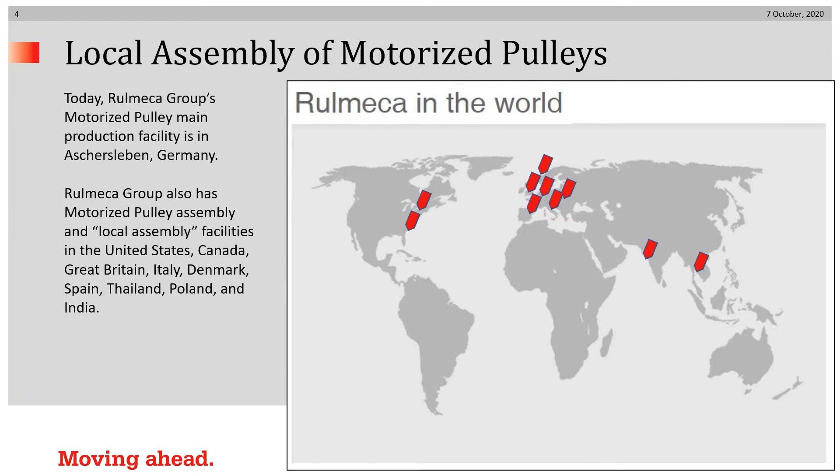What you're looking at right now is the slide that depicts assembly and local assembly centers around the Rulmeca world. Our main production plant is in Aschersleben, Germany. We also have other assembly plants or local assembly plants in Canada, the US, Poland, Denmark, UK, Spain, Italy, India, and Thailand.

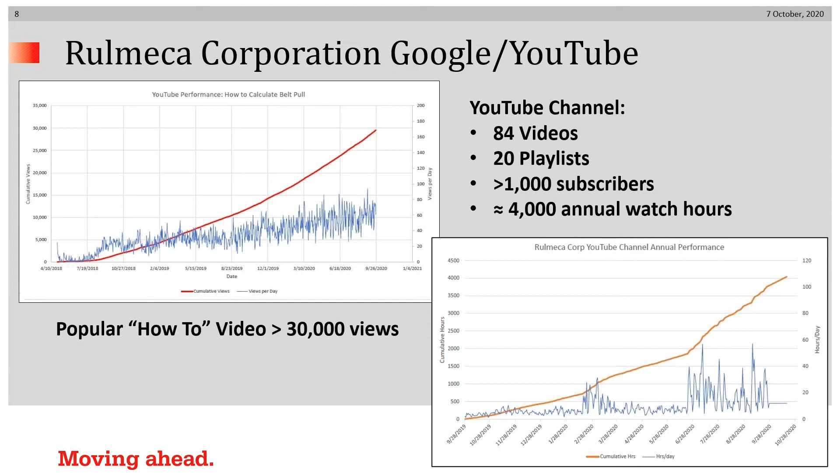We're happy about all that stuff, mainly because it's providing information to folks who need it around the world 24/7. When we're sleeping, the videos are still talking, if that's convenient for you. We now have 84 training videos and 20 playlists, 11 of which were created specifically for the MOOC, the course.

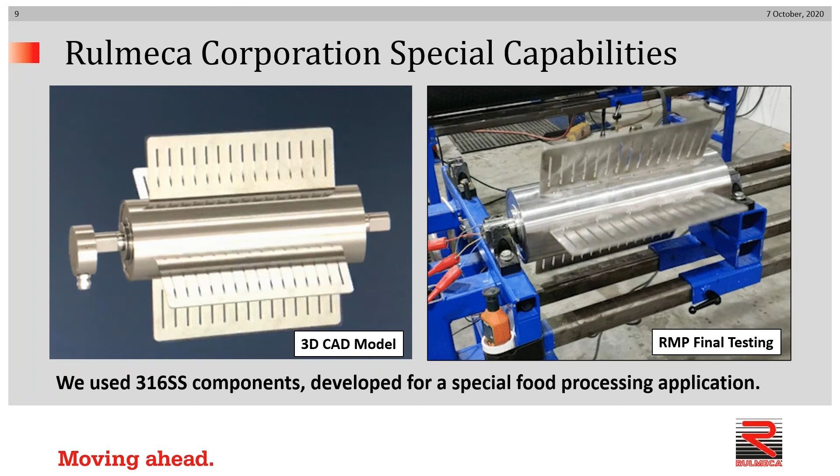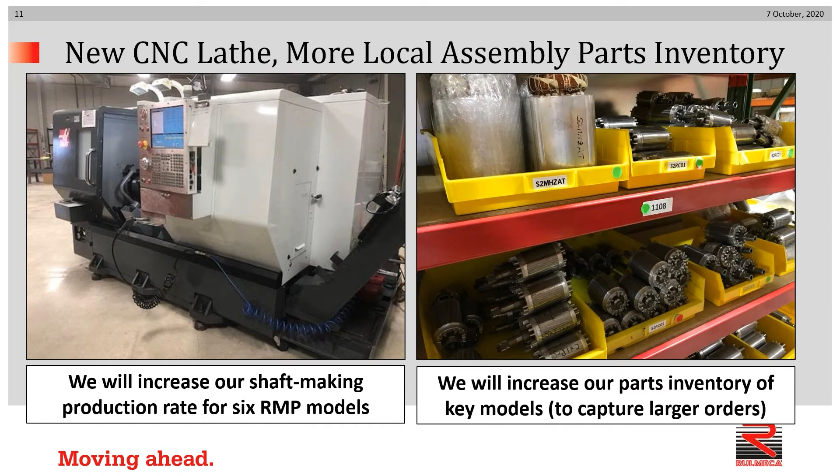And on the right, you just see a picture I took a couple of hours ago to show you some parts in stock. We have permission from the holding company to increase our inventory by the end of this year, particularly in small motorized pulley parts, in order to enable us to capture larger orders. Whereas for some years we were able to do onesie-twosies pretty quickly, now we're challenged with plenty of opportunities to do 10sies and 12sies, and we're preparing ourselves to do just that.

Now I draw your attention to a news item which pertains to calculating power in conveyor belts. The old Microsoft Excel program, which was written back in the 90s, which we've used until very recently, has been superseded by a free cloud-based online version, which is based on the latest CEMA edition of conveyor drive power methodology.

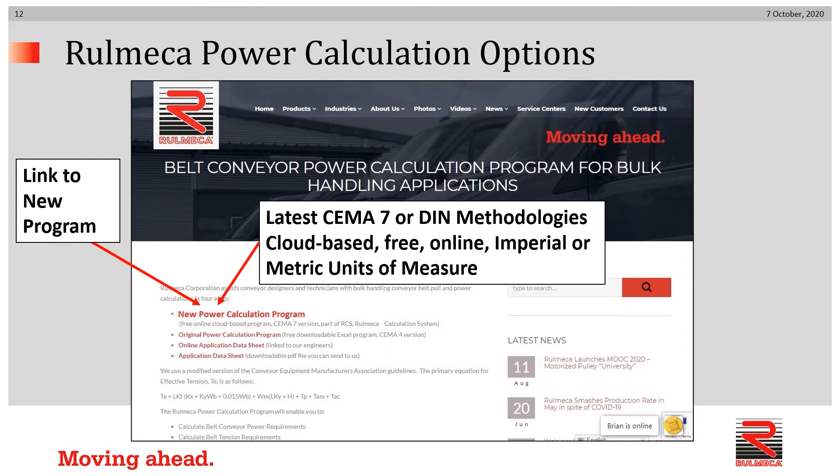As well as DIN for the European users of it. And it's available not only in imperial units of measure, but also metric. You can find it on our website, linked as you see there.

Here is a summary of the 6 components of the first semester, which we will be discussing. First, we have the introductory material. For those of you that aren't familiar with the spreadsheet in the back, it shows the duration of each video and gives hyperlinks to the individual videos, as well as a playlist for each of the 6 modules.

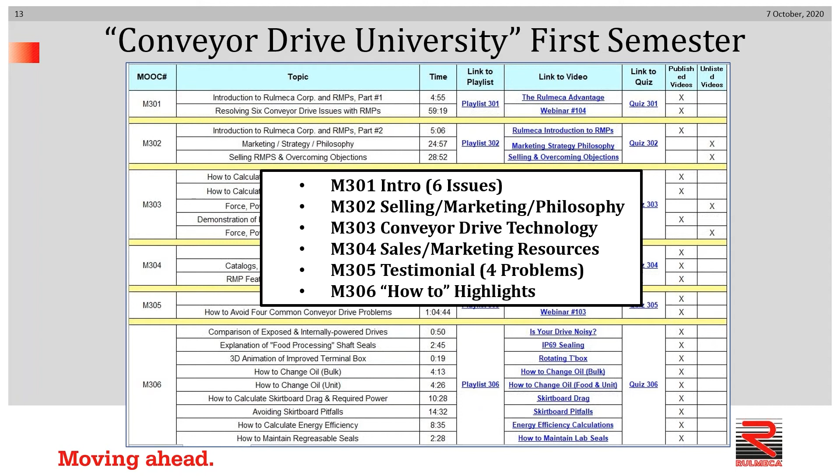And a hyperlink to the quiz. So we'll be discussing segments of each of these things, including the introduction, selling, marketing, and philosophy, conveyor drive technology, your sales and marketing resources, conveyor problems and a testimonial, and finally some how-to highlights from our short segmented videos. Let's look at the introductory material.

As those of you already know who have seen the video, we highlight the fact that we offer the Rulmeca Advantage. And what is that? Well, the Rulmeca Advantage is rolling up our sleeves and partnering with our customers to solve their conveyor problems, no matter what it takes. And as I hope you'll see in the next hour, we're serious when we say just that.

The webinar, which we did some months back, helped viewers resolve 6 conveyor drive issues, namely reliability, maintainability, safety, space or weight problems, belt slippage problems, and inadequate power problems. You have before you a picture of an example of an exposed drive system, in fact, 2 exposed drive systems in a very, very corrosive solar salt mine environment.

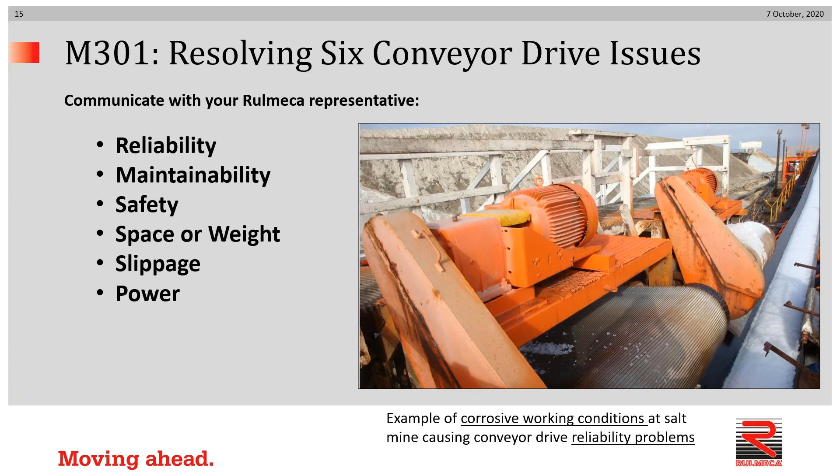Let's talk about what is the potential solution, or how is the motorized pulley a potential solution to those 6 things that I mentioned previously.

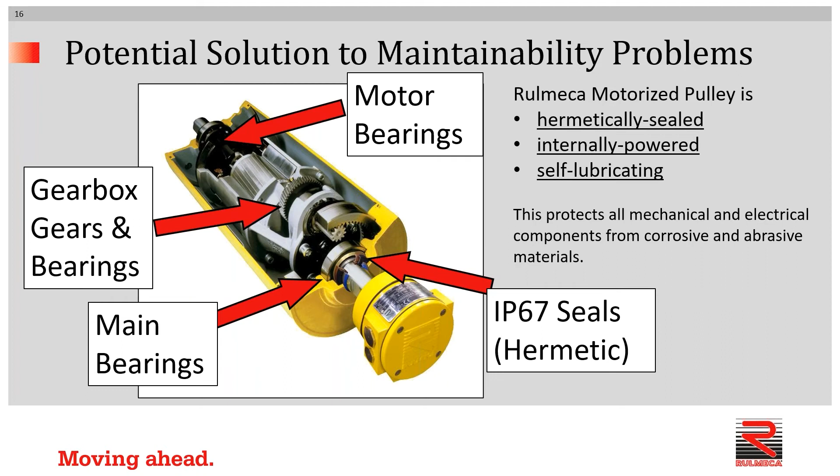It's a potential solution because the motorized pulley concept offers a conveyor drive package which is hermetically sealed, internally powered, and self-lubricating. As you can see pictured before you, the motor bearings, the gearbox, gears, and bearings, and the main bearings are all enclosed within a hermetically sealed shell. And that is the secret of success. We protect the important components from harsh elements.

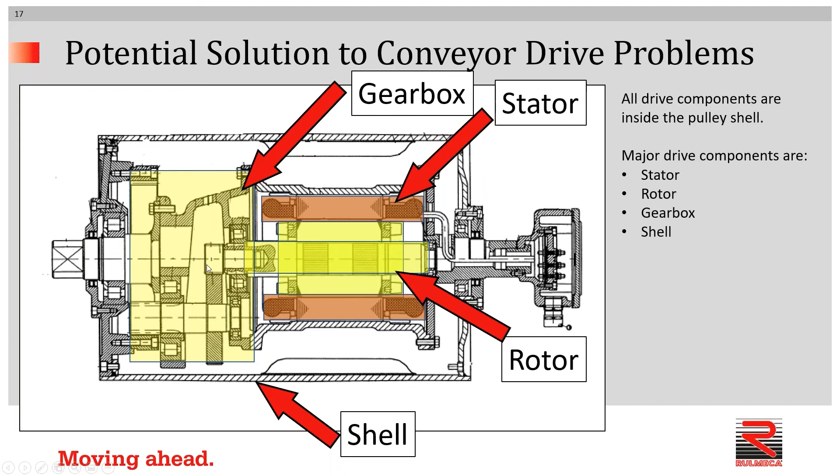This cross-section allows us to show the basic elements, namely the stator, which is shown in orange in color, the rotor, which of course rotates within the stator and is directly coupled to the gearbox, also pictured here in yellow. These 2 components, the motor and the gearbox, are enclosed and protected.

We attach drip lips to the inner surface of the pulley shell so that oil can be circulated. And that oil serves 2 purposes. The obvious one is lubrication of all mechanical components, and the less obvious one is its usage as a heat transfer medium to get heat from the hot stator transferred to the pulley shell so that heat can be dissipated through the shell and into the belt, which we use as an infinite heat sink.

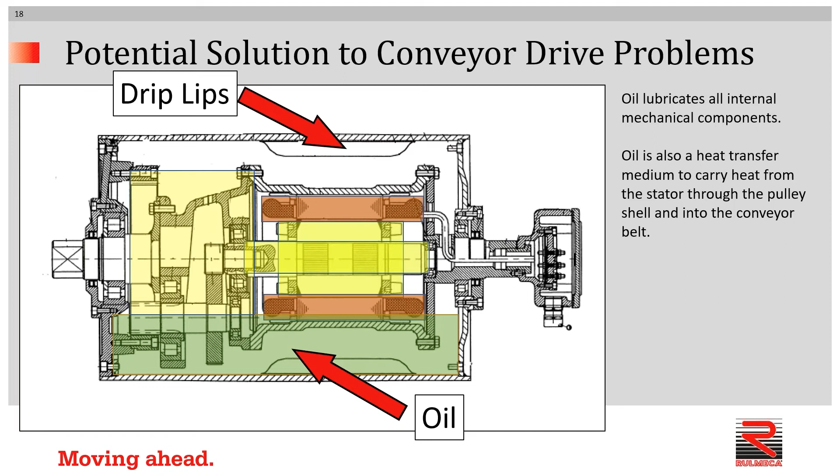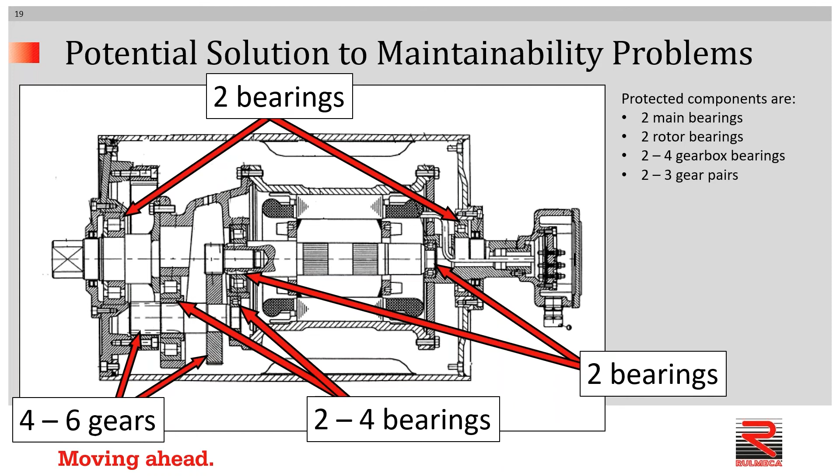This is a new slide we put together fairly recently, and you can see the number of bearings and the number of gears which are all protected through this hermetically sealed, automatically lubricated drive system. There can be as many as 4 gearbox bearings or 3 gear pairs, as you can see pictured here.

The drip lips act like a water wheel to constantly pour oil onto the stator and splash it through the inner workings. And most people nowadays specify synthetic oil, which is good for 50,000 hours of operation.

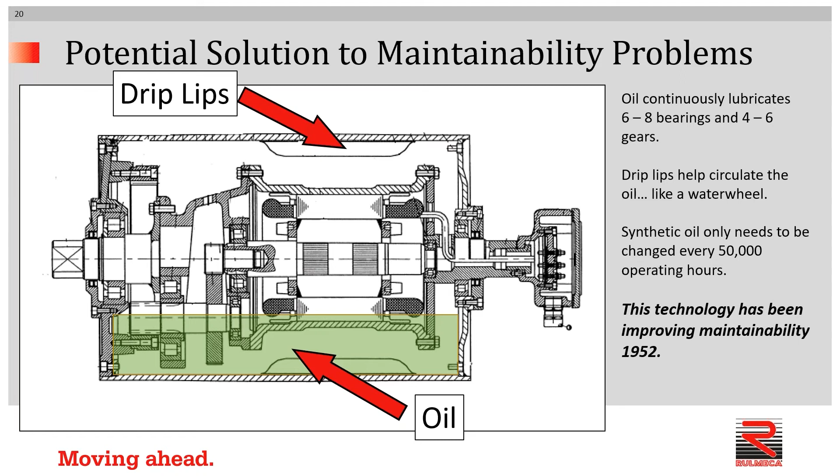And for those of you who may be new to the motorized pulley idea, we've been doing this since the early 1950s. This is old technology, which we constantly improve, but the idea has been around for a long time.

Here's a way that the motorized pulley can enhance safety or improve safety. I took this picture at a power plant in the UK a few years back. In the upper center, you can see an exposed drive system, which was originally mounted above the chute, which transferred coal into these deep bunkers.

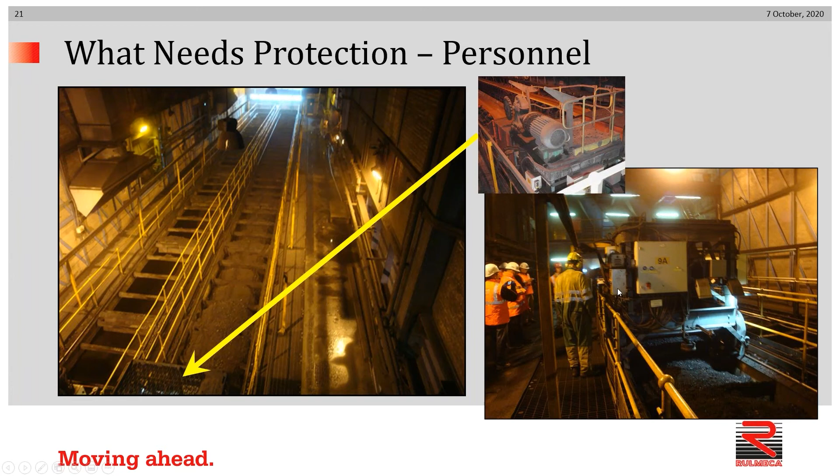A maintenance man was maintaining this thing, and unfortunately, a weld broke on the handrail, and he could have fallen to his death in one of these bunkers, but fortunately for him, it had just been filled with coal. He wasn't hurt, but plant personnel took careful attention to the fact that the exposed drive system, which was getting long in the tooth, needed to be taken care of, and their idea was to install a motorized pulley, which of course, in a sense, is self-maintaining.

These are new slides for us. For those of you that have seen some of these presentations in the past, they help us to illustrate that the motorized pulley centers the weight between the two support beams, it enables manufacturers of conveyors to use lighter structure than otherwise might be possible.

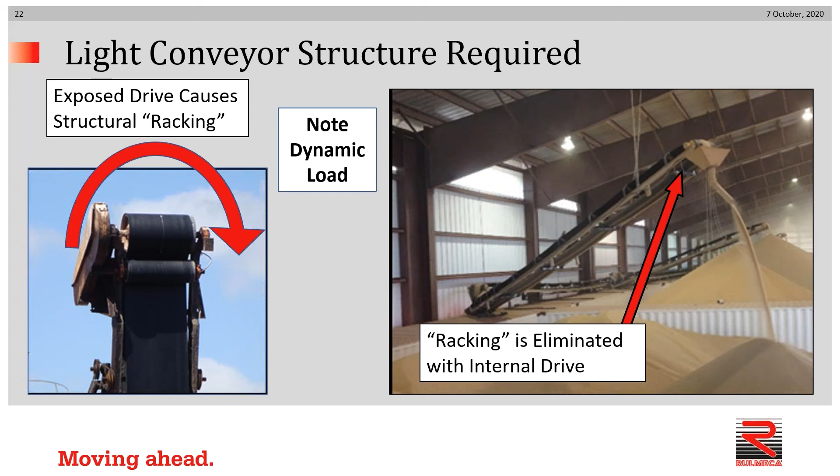Because it sits between the beam, there is no overhung load. The weight is supported more or less evenly between the two beams of the conveyor. And also because the torque is transferred through the dead shaft and into the structure, we avoid the racking action, which is very common, particularly on flexible conveyors.

In addition to the obvious reason why a motorized pulley is compact, because the parts are on the inside, the less obvious thing is that motorized pulleys in general are approximately 30% lighter in weight than an exposed drive system. There's no cast iron enclosure required for the motor or the gearbox, because we use the pulley shell as an enclosure. So we eliminate that redundant part.

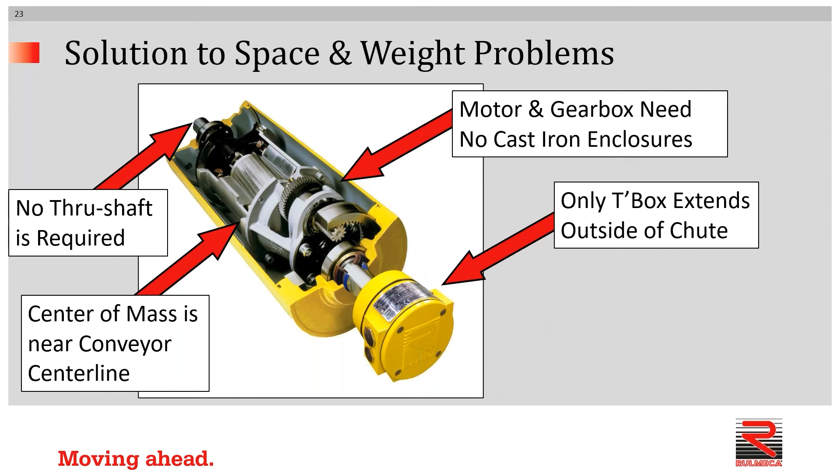In addition, this customer added more power to the conveyor.

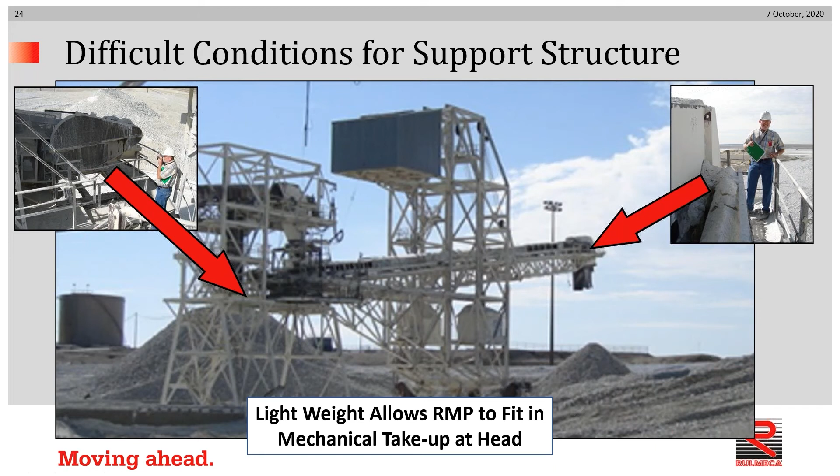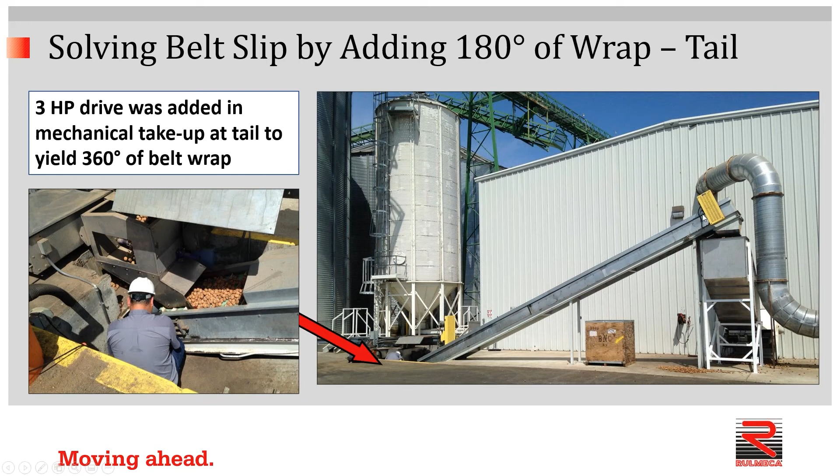You can see one of our distributors taking a look at the tail section and taking measurements so that a motorized pulley could be fit into the tail. So the retrofit was to eliminate the exposed drive at the head, replacing it with drives at the head and tail. Slippage was solved cold.

This is another example of a conversion from a single drive at the head to a dual drive at the head and tail. This customer had a problem with inadequate power at startup, and that's what prompted the call to Rulmeca Corporation. Our calculations showed that the original 75 horsepower was inadequate, so we recommended converting to two 50 horsepower units, one at the head and one at the tail.

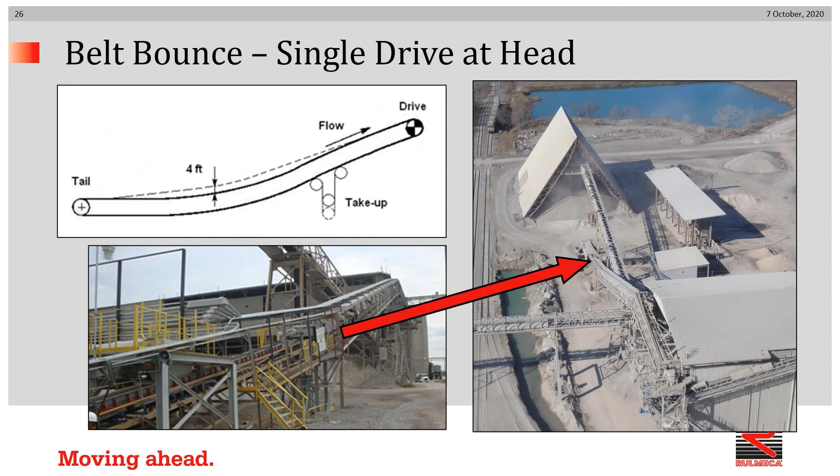That was done, and the customer was not only satisfied that extra power solved the startup problem that was occurring, but it gave a side benefit as well: it eliminated a belt bouncing problem, which occurred every time the conveyor was started up empty.

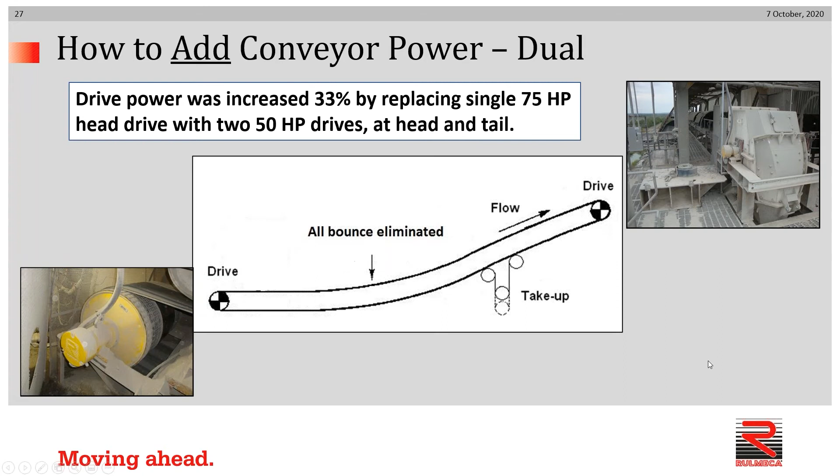So installing a drive at the head and a drive at the tail not only afforded more power, but also handled the belt tensions in such a way that problematic belt bouncing was eliminated. And it wasn't just a noise the bounce was making—it was actually causing damage to the belt occasionally, and sometimes damage to the feeder support structure as well, all completely eliminated now.

Let's have a look now at module number 302, which addresses marketing philosophy and strategy, if you will.

Our company is committed, and this webinar is one example, to training salespeople to be subject matter experts. We need to be able to help users and designers of conveyors to optimize what they have. We spend a lot of time doing that: writing papers, making videos nowadays, putting information on our website. When possible, pre-COVID and post-COVID, we do on-site training.

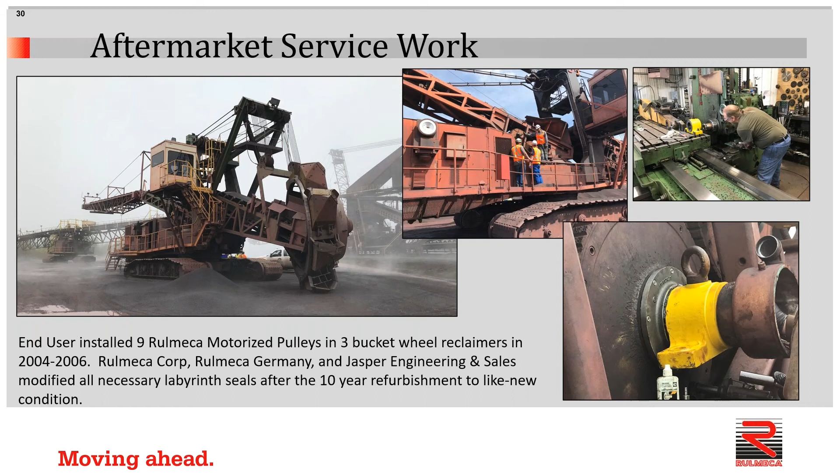Here's an example of aftermarket service work. This end user installed 9 of our large motorized pulleys, 100 horsepower or larger, on 3 bucket wheels, and did a refurb after 10 years of service. During the refurbishment, there were some problems encountered, so Rulmeca Germany, our sister company, as well as us and our local distributor, Jasper, partnered to help this customer make his 10-year refurbishment like new. And we honored the warranty even though it had expired many, many years prior. That's kind of our attitude.

Let's take a look at some additional items in Module 302. How would a salesperson overcome the statement that your price is too high?

Your motorized pulley drive is a premium compared to the way I've been doing it for 10 years. Why should I consider spending more money? Well, we suggest that end users consider the fact that downtime is expensive and exposed drive systems can break down since they're less protected than motorized pulleys are.

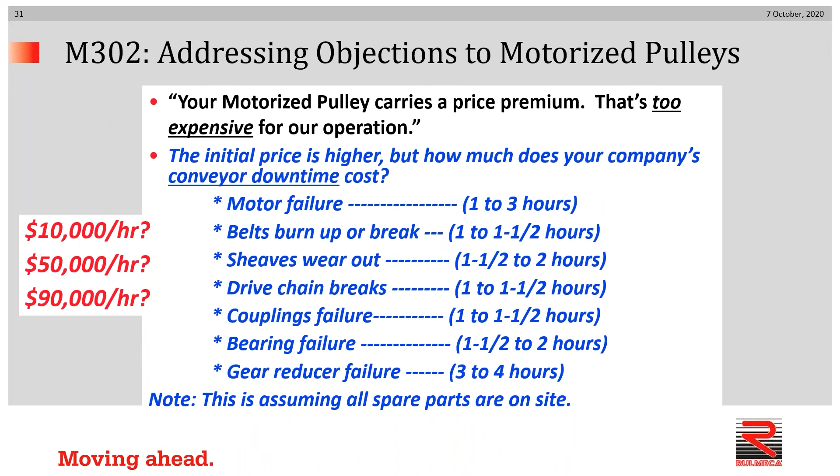Even though the individual cost of the components might be less at the outset, it's important to remember that all of the parts need to be stocked. That's an important consideration. And of course, we always suggest that operators think of what downtime costs. Is it $10,000 an hour, $50,000 an hour, some huge amount of dollars per hour? If that's the case, then the premium price for a product which is more reliable could actually offer the lowest total cost of ownership.

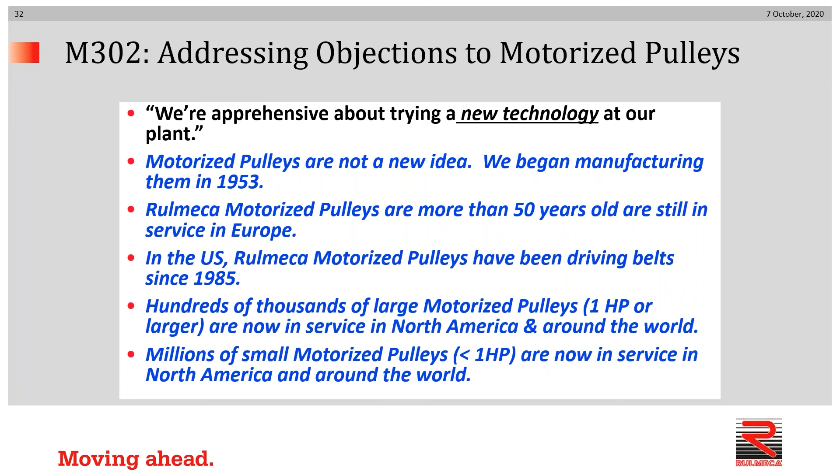Sometimes we hear as we make presentations that people are apprehensive about this new technology. Well, as I said previously, we started making them in the early 50s. And there are hundreds of thousands of large motorized pulleys in service throughout North America and the world, and literally millions of small motorized pulleys in service in North America and around the world. Believe it or not, motorized pulleys in excess of 50 years old are still working.

Let's turn our attention now to some topics on the subject of conveyor drive technology, particularly belt tension. We have one full video that explains how to calculate TE, which you see pictured on the upper right-hand corner. It's essential to know TE, or effective tension, in order to be able to figure out how much power is required to move the conveyor belt.

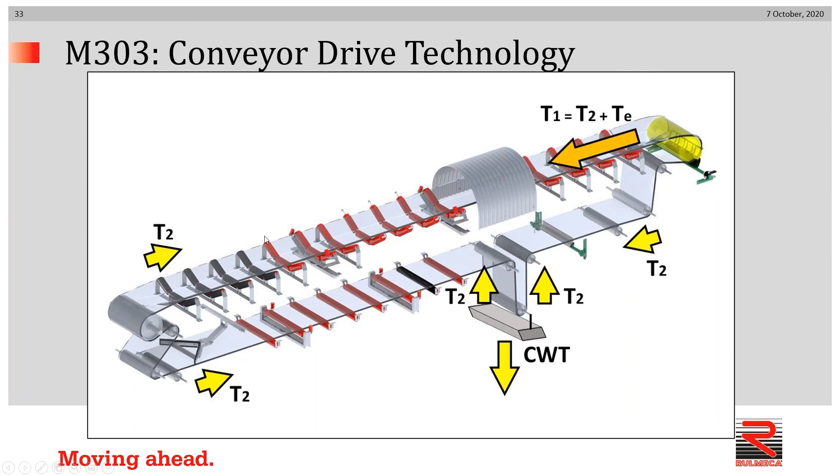In addition to calculating TE, and we have programs to do that, you can do it yourself or you can ask us for assistance. It's essential to calculate T2, and T2 is the tension required to prevent slippage on the pulley face, and T2 is also that tension required to prevent sag in the lowest tension area of the belt. So we help with that stuff.

Our videos covered a tutorial on force, work and power, a very basic rudimentary thing, 30 minutes of that. We also presented a video on how asynchronous three-phase motors work, and I really draw your attention to that if you haven't already seen it. It takes the mystery out of it. And we put together both unit handling and bulk handling short videos, and all of these have explained in as simple a manner as possible how to go about calculating required belt pull, and therefore how to calculate required belt power.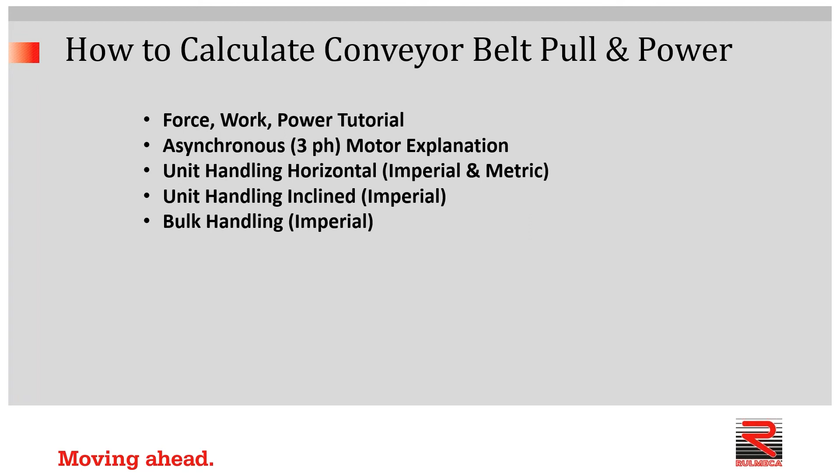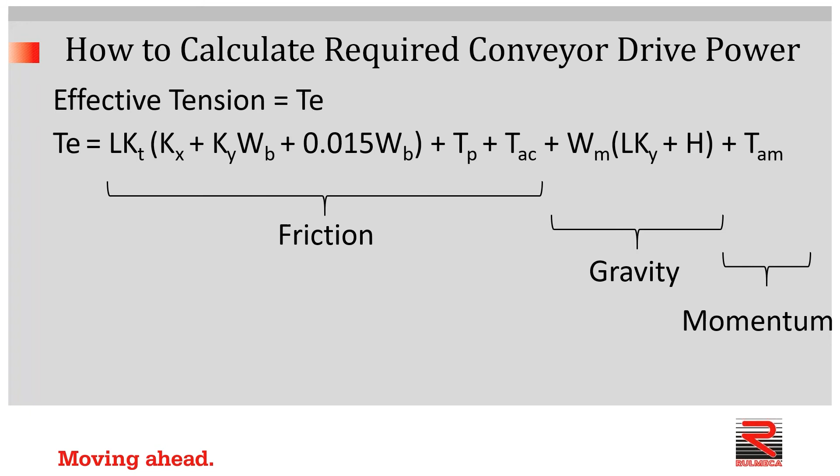We won't go into this equation, but this is the equation we've used for more than 20 years. It's called the historical method developed by CEMA, now superseded by the universal method in the new program I mentioned, which has just come online within the last few months. But we've used this equation to develop the tension required to overcome friction, gravity and momentum. And the takeaway for all of you folks who are hearing some of this for the first time is this.

Let me simplify all of these numbers and letters by saying belt power, which is required to move a conveyor belt, is simply the product of the effective tension in pounds, in imperial units, multiplied by the required belt speed in feet per minute. Pounds times feet per minute gives you the power.

And we know in imperial units that 33,000 foot-pounds per minute equals 1 horsepower. So if you know the number of pounds you need to pull on the belt with and the feet per minute you need, then you, by definition, know the power.

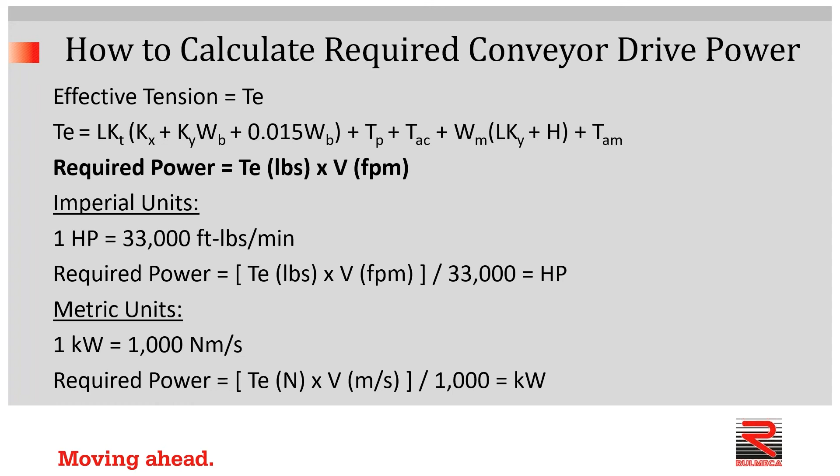And in metric units, we know that 1 kilowatt equals 1,000 Newton meters per second. So if you know the number of newtons to drive your belt and your belt speed in meters per second, you can certainly calculate the required kilowatts.

Now, here are some resources for both sales and marketing personnel, as well as end users and designers and so forth. This is a screenshot I took of our website. You can see the hyperlink where you would click to get the power calculation programs, of which there are 4. Also, we have plenty of catalogs and brochures, as you would expect.

And since about 6 months ago, we've been using a new online chat service. Brian, are you able to add some comment on that chat service? I guess we were surprised to see how much usage it was getting, right? Yeah, we get a fair number of users per month, some handful.

We noticed kind of a trend, and some of our customers, vendors, and colleagues in this conveyor design world were using this technology. It's inexpensive to use, it's easy to use, so we put it on our website just to check, and it's good. A lot of people who may or may not have the time to send emails just want a quick answer, or just want a quick reach out, it's an easy way to reach out to us.

We generally man it from 8 to 5, and then afterwards it's basically an email service. So if you get to us after 5 o'clock Eastern, it'll send an email and one of us will respond first in the morning, or maybe even that evening. I guess it depends on the urgency of the email.

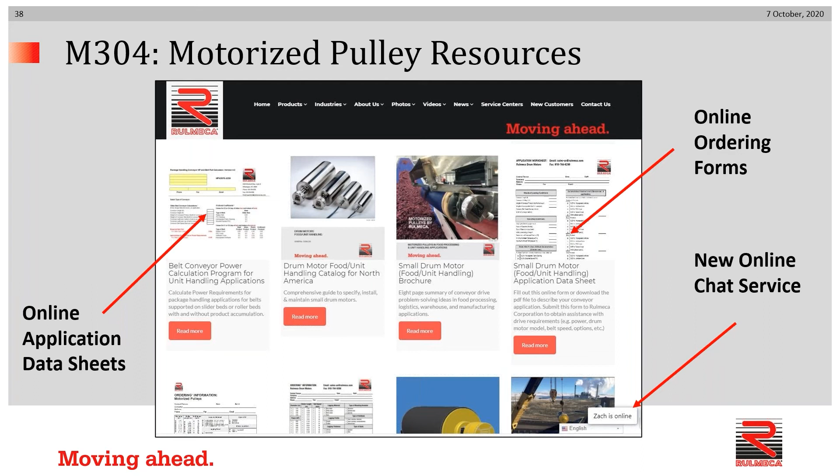Continuing on with resources available in downloadable format are our online application data sheets, both for bulk and unit, our online ordering forms for bulk and unit, as well as brochures, flyers, and technical papers.

Now, I want to toot our horn on this YouTube channel because we have been amazed at how many people have apparently seen it to be a benefit. Now we have 84 videos all told, 20 playlists. As I mentioned previously, 11 were created for the online course that we're having a midterm for right now. We have over 1,000 subscribers and more than 4,000 annual watch hours.

We've developed a playlist in such a way that if somebody wants information, they can select the appropriate playlist, whether it would be something of a technical nature or something of a commercial nature. That's all there for your viewing pleasure.

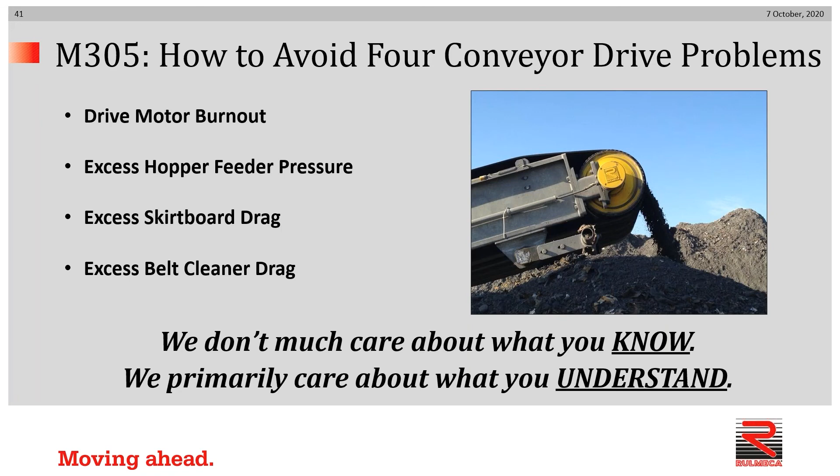Let's turn our attention now to the 5th module in our first semester. In that module, we went through drive motor burnout, excessive hopper feeder pressure, excessive skirt board drag, and excessive belt cleaner drag. I'm going to skip discussion on hopper feeder pressure, skirt board, and belt cleaners because we'll go through that in more detail in the final, on December the 9th, when we have our next webinar following the 2nd semester, because the videos go into more detail. So we'll skip that for now. However, we will spend some time looking at the topic of drive motor burnout because it's a pretty important topic, and this is a great place to cover it.

Why do conveyor problems occur? Well, sometimes the wrong equipment is installed. That's pretty obvious, you shouldn't do that. But more often than not, correct equipment is installed, but something has changed. Maybe this is obvious to some, maybe not to others, but the correct equipment may have been installed, and something such as conveyor handling rate may have changed. Maybe production pressure to go from, say, 400 tons per hour to 800 has put a strain on something, causing what was adequate power to be inadequate.

Or something more subtle, such as material may have changed. A system originally developed to move wood chips may have been divested and sold to another facility who is now handling iron ore. The change in material may change the characteristics or behavior of the material being used, and therefore be problematic to some of the original equipment, such as the motor or the gearbox.

Ambient conditions may have changed. A system developed for lower temperatures may be in service in higher temperatures, or vice versa. Something moved from one plant to another, with the second plant being in a more tropical environment, the humidity may be causing problems whereas previously there were none. And last but not least, conveyor parameters, when they change, have a dramatic impact sometimes on the drive mechanism. If the conveyor is twice as long as it used to be, 10 horsepower or 50 horsepower might not be enough.

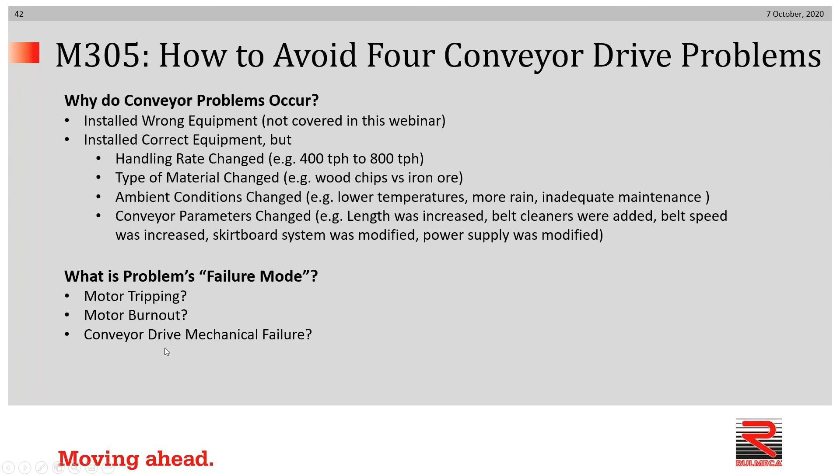Now, it's very important when talking about motor problems, so-called, is it minor or is it major? Is the motor tripping, or is the motor burning out? Because if the motor is tripping, it might be a simple matter of making an adjustment and stopping the tripping, and tripping may cause a problem for 5 minutes. Fix the problem and you're back up. A motor burnout would take however long it would take to swap out the motor, or you have a major conveyor drive mechanical failure. So we have small and large problems, and any one of them should be addressed. We'll be talking about burnout now.

Common causes of burnout are too much current, maybe that's obvious. That is by far the overwhelmingly most important reason for motor burnout. Too much current, which means too much heat. Other reasons for burnout would be wrong voltage or unbalanced phases, though those are less common.

It would be important to avoid electrical causes of burnout in your supply voltage. Of course, you want to eliminate any voltage surge. It's necessary to protect your building as best you can from lightning strikes, though sometimes it gets through anyway. A voltage surge, which would be a problem with a resonance-induced frequency on a line connecting a VFD to a motor, could be avoided by filtering. So things like that can be done. Imbalanced phases is another problem, less common, but also there.

How to avoid mechanical causes? You should check the required power, and you should check for extra drag, as I mentioned previously.

And last but not least, how should you protect motors? You should verify your overcurrent setting is correct. You should use thermal protection if any, and we're pretty fussy about that. We certainly recommend to all of our customers to use thermal protection in addition to overcurrent protection, which I'll explain in a minute. And when all else fails, if you find that for whatever reason your power is inadequate, then by all means install a more powerful motor. Or in the case of a motorized pulley, install a second drive to the belt.

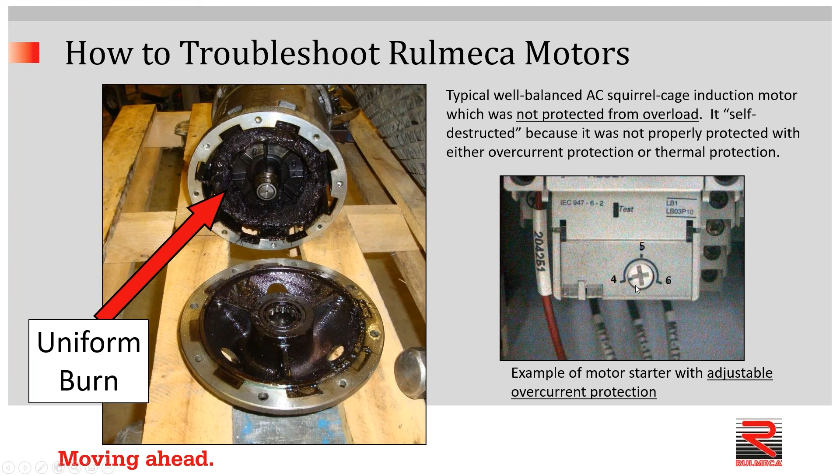Here's an example of a motor starter which has a variable overcurrent switch. So this overcurrent setting can be at 4 amps, 5 amps, or 6. This one happens to be set at 4 amps. If the motor is put in service and it trips, and every other day the person has to go over and see why the motor tripped, there is a temptation to put a screwdriver in that hole and tweak it up to 5 amps to stop, quote, the nuisance trips. That's a very bad thing to do.

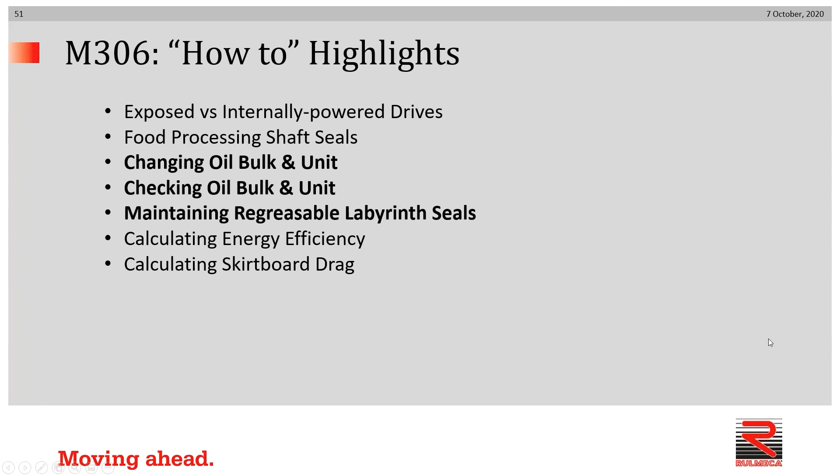We won't have time in this webinar to talk about it, but I really want to point out to those of you interested in energy efficiency or power savings, take a look at that video. That's 7 minutes well spent - it'll show you how to calculate a reduction in kilowatt hours.

You would put the oil holes at the 4 o'clock and 10 o'clock position. Of course the pulley can be rotated, but if you fix it so the oil plugs are located at 4 o'clock and 10 o'clock, you can put a piece of wood or cardboard in the bottom hole like a dipstick and verify the oil is just at the bottom of the bottom hole. That's a quick and dirty way of making sure you have enough oil in the pulley.

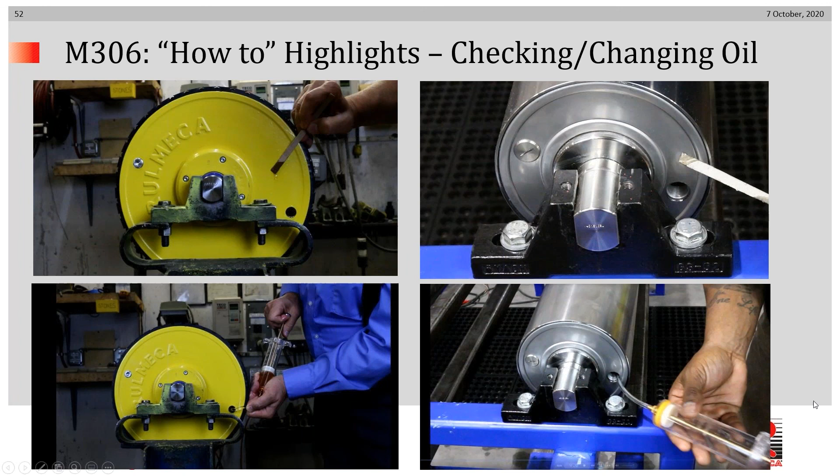Likewise, you do exactly the same thing on the smaller diameter pulley. If your operation does tribology and you want to inspect the oil, it's a simple matter of sucking the oil out of the hole. Once the holes are put to the 4 o'clock and 10 o'clock position, simply put the syringe in the hole and extract what you need to test it. Of course there are a variety of other ways of checking oil beyond tribology, but that's one of them.

The Viton shaft seals - we switched over to that about 10 years ago because Viton is better able to withstand higher pressure than the nitrile one is. Also higher heat - Viton can handle higher heat.

As it says in the video, I'll say right now: don't buy a regreasable labyrinth seal if you're not going to purge it, because it's worse than the standard sealing system. An unpurged labyrinth seal is more problematic than a non-maintained standard shaft seal, because the grease can actually hold any dust that comes through the labyrinth and press it against the nitrile seal, causing premature wear. So if you invest in a labyrinth seal system in a bulk application, be sure to purge it - and we sell grease canisters to make that as easy as possible.